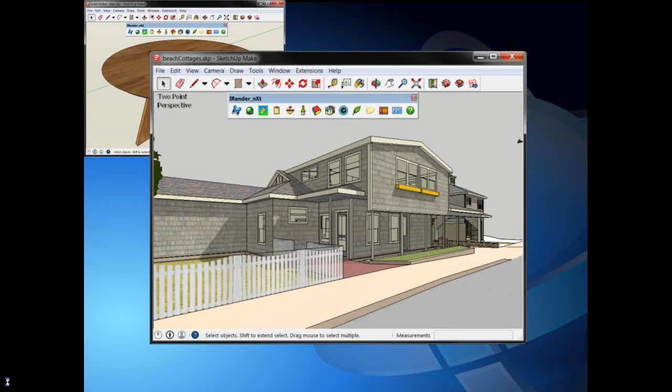Also, we don't know specifically how you use SketchUp in your office, so here's what we're going to do today. First, I'm going to open a model of an object, in this case a wooden table, and we'll create some renderings from it. The table is from the 3D warehouse. Next, we'll load a model of a beach cottage, also from the 3D warehouse. And then finally, we've built a small office interior, and we'll have a lot of fun with that with IRender nXt. In each of these examples, we're going to focus on how IRender nXt facilitates the creation of photorealistic renderings from SketchUp models.

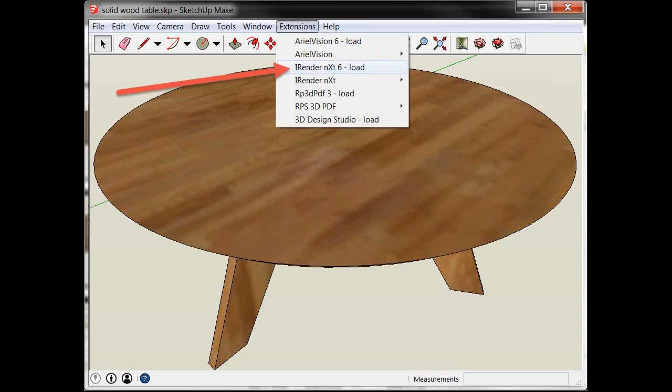If you have installed a trial version of IRender nXt, when you launch SketchUp and open a model, you won't have access to IRender nXt menus until you click Extensions. When you do, this drop-down menu will offer the IRender nXt software. So click IRender nXt 6 Load, and the interface will load for you.

Once we have a model open, I'm always pretty anxious to just create a rendering. So we'll click Render, and we see this dialog. This is the IRender nXt rendering settings dialog, and across the top you'll notice there are 5 lighting presets. These are very useful for novice and expert IRender nXt users. They prevent the creation of a rendering with no lighting whatsoever, which would leave your screen blank. We're going to use quite a few of these today.

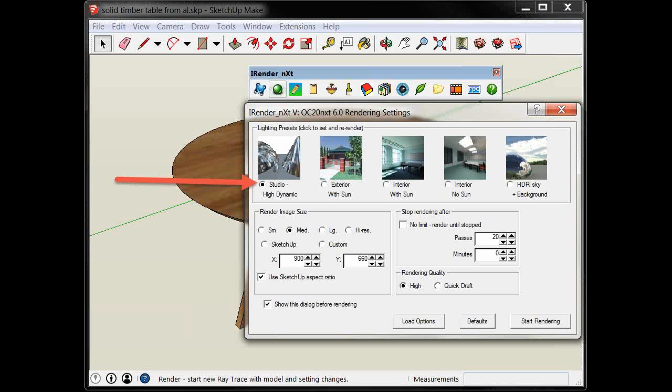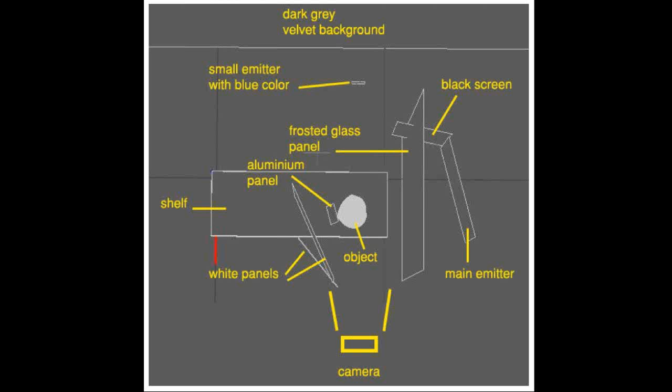The first one, very appropriate for our table, is a lighting preset called Studio High Dynamic. Here's how it works: imagine you had a table and took it to a professional photographer for a nice catalog photograph. The photographer would set up a bunch of lights, reflectors, some frosted glass perhaps, and in the end create a very nice photograph for your catalog. So Studio High Dynamic emulates this kind of lighting setting.

Once Studio High Dynamic is selected, all we need to do is start the rendering. And here's a rendering of our table.

Now, I'm going to be mentioning this several times today. There are a couple of key factors to photorealistic rendering. The first and probably most obvious is that we have access to materials that are photorealistic. This is a photograph of wood, so it is in and of itself very real. But what the model lacks in looking photoreal is the finish on the wood.

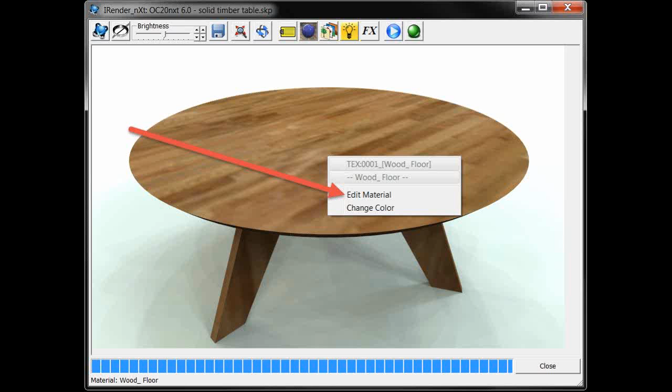What I want to do is click on the wood. That brings up this pop-up menu, and one option is Edit Material. Now, I want you to notice something interesting: we have not returned to SketchUp to do this. I'm still looking at the IRender nXt render window. So once a rendering is complete, I can click on a surface and edit a material, which brings up this pop-up menu.

What I want to do is change the finish of this wood to reflective. Click Reflective, click OK, and now render the model.

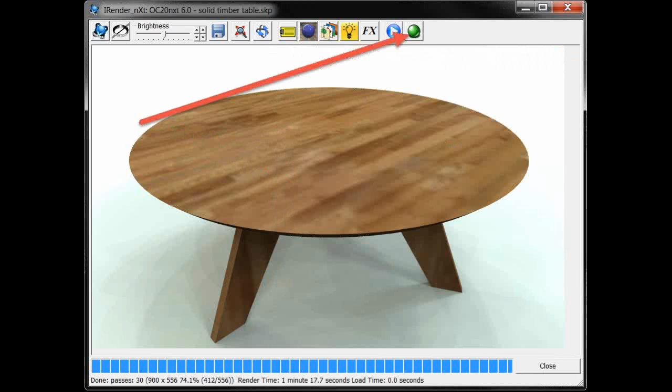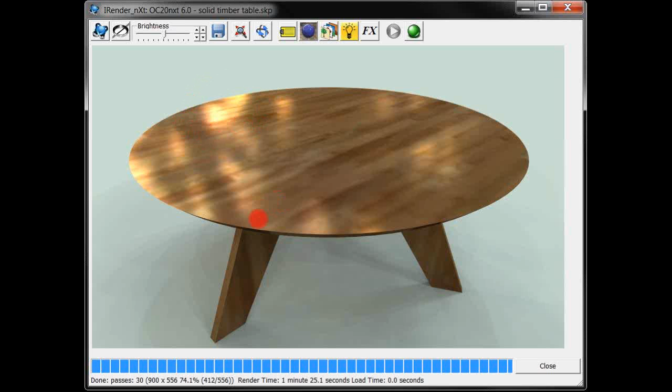This is the effect of Studio High Dynamic lighting with a reflective wood surface. You'll notice very subtle shading on this model underneath this table, all down in here. The biggest benefit of Studio High Dynamic lighting is this wood is now sampled in very bright light, in filtered light, and also in shadow. The nice thing is when I use this table model in another scene, I can reliably predict how the wood will render in virtually any lighting condition. So it's a nice preview of how the table will render.

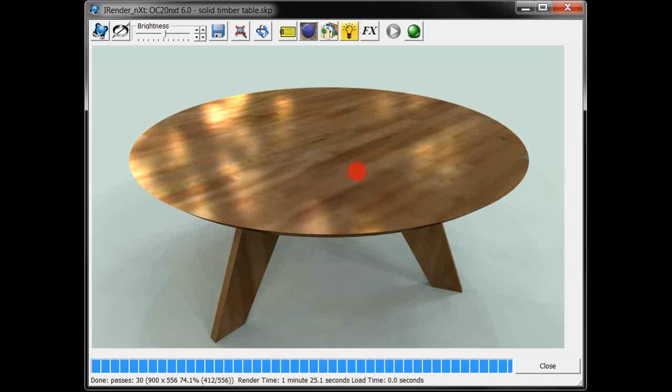Now I embellished this a little bit. This might be more what a photographer would provide for me. This was rendered with the Studio High Dynamic lighting preset. And of course I added, for the purposes of helping with scale, a newspaper and a vase.

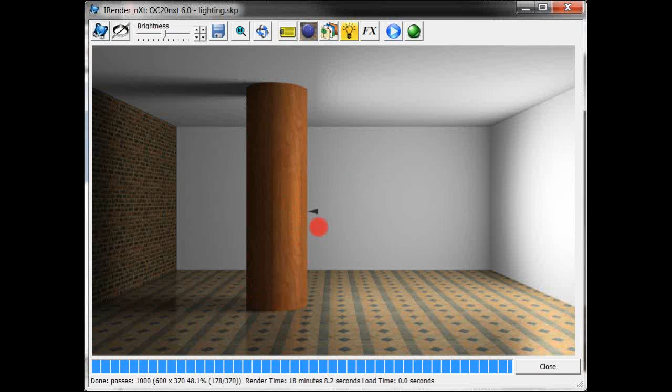All surfaces are reflecting light, and light is bouncing around the model, illuminating all of the other surfaces. In this case, all accomplished from one light. This is going to be important as we move on to the next model.

This is a beach cabin, again from the 3D warehouse. The nice thing about these 3D warehouse models is that when you open them, you don't need to do anything except click the render button. When we do for this model, we're going to change to a different lighting preset. This one's probably quite a lot easier to understand.

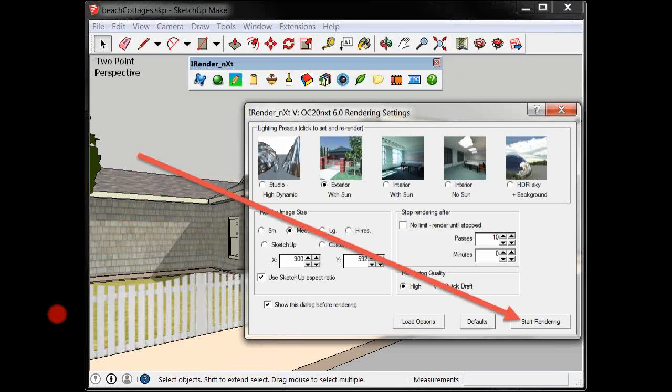This is exterior lighting, and it says with sun. What that means is that the sun is going to be used to cast shadows. Click Start Rendering, and here's the rendering. So here's the sun shadow.

You'll notice that the sky is the default SketchUp sky, and all of the glass in our model is reflective. The glass here is reflecting the sky. Down here it's reflecting the sky and also reflecting the columns. Pretty nice. I'd like to make this a little bit more convincing because I actually want a more convincing reflection in the windows.

What I want to show you is that it's not necessary to return to SketchUp, make adjustments to the model, and then create a whole new rendering. Now this didn't take that long. Across the bottom you can see that this rendering was completed in 20 passes, not very many, and it took 2 minutes to render.

So it wouldn't be that big of a deal, but it's even faster when you use this tool. This is the tone operator and filters dialog. And what I'd like to do is just increase the overall brightness of my rendering. That's done right here. So I'm going to bump this up from 50 to 60, and already you can see that the reflection of the sky is much more convincing, and additionally, because now there's more light entering into the building, I can actually see through the glass quite a bit better.

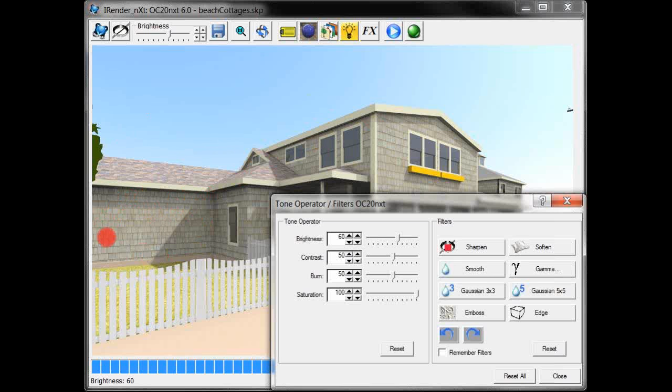What I'm not very happy about is that brightening the image caused me to lose a little bit of detail on this siding. So we're going to use a filter to adjust that. It's called the sharpen filter, and all I do is click, and now I have all of that detail restored to the siding. So now the image is a little bit brighter, still nice detail, great reflections in the windows.

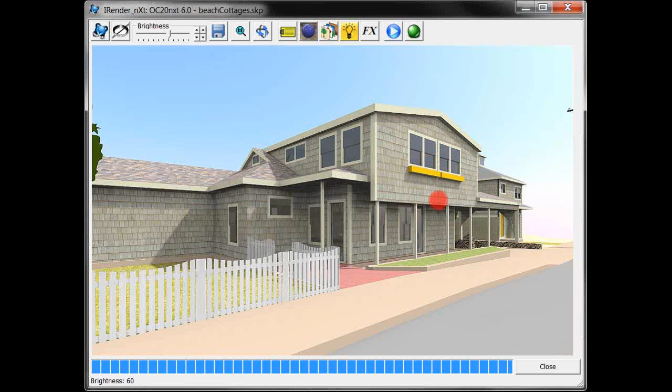This is another way to get to render settings. You'll notice that along the left-hand side, there's a nice long list of render settings. None of these are very complicated. They're actually pretty easy to understand. The first one, presets, brings us back to a dialog that we're getting pretty familiar with.

Another of the lighting presets is high dynamic range image to be used as a sky and also the background of our rendering. When we select it, all we need to do following is click Render. Now instead of the SketchUp default sky, we have this really nice photographic sky with clouds.

And look what that does to the reflections. Now instead of just boring blue, I have cloud reflections in my windows. The illumination to the model from the sky is actually quite a bit brighter, and that means it's even lighter inside the building, so the windows also become a little bit more transparent. In fact, it's very evident here where I can actually see through the building to a door in the back.

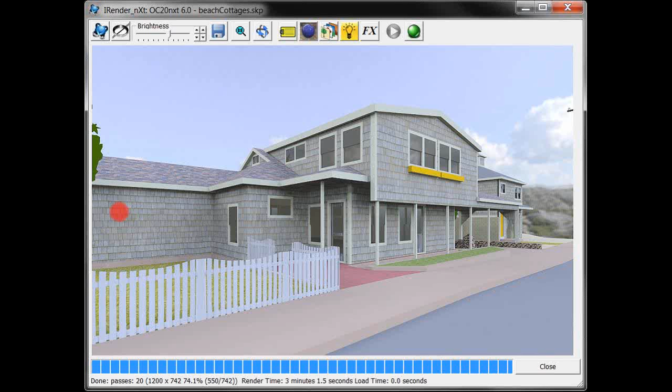Now I want you to keep in mind that so far this has been accomplished without requiring me to return to SketchUp. So what I'm doing is I'm taking a completed rendering and I'm enhancing it for the presentation that I have coming up.

There are more options, interestingly enough, and one of them is effects. An effect that is actually quite nice, especially on this model, is the use of haze. This is a very straightforward setting. First is the near setting, which simply describes how far from where I'm standing is the haze going to begin. And in all fairness, I've actually experimented with this a little bit, so I know that the right distance for this model from where I'm standing is 70 feet.

Once I have the distance set, I just need to increase the strength of the haze, and look what happens. Now this haze separates my wonderful project from this adjacent building. It's going to help my client keep focused on my building so that I can point out all of the great design features.

So far, from one completed rendering, I actually have 3 renderings that I can save and decide whether or not I want to use them in my presentation. The first is a rendering with the SketchUp sky. That was actually a pretty nice rendering, especially when we brightened it and kind of improved on the detail and improved the reflections in the windows.

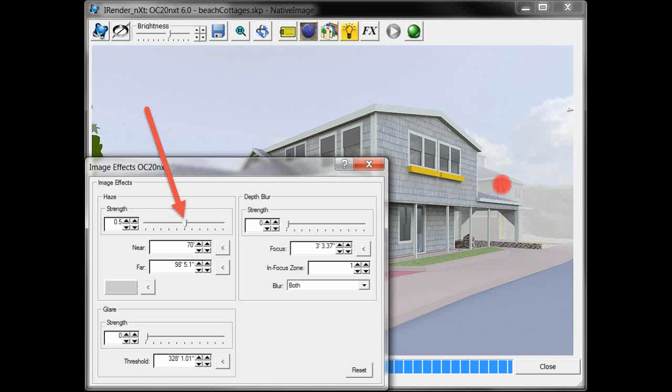Personally, the one I like a little bit better is with the sky background and the clouds in the windows. So that's rendering number 2. And now a third rendering, which uses haze to push this adjacent building back away from mine, emphasizing my project in the rendering.

So from one completed rendering, which took 2 minutes 6 seconds, I end up with 3 renderings, any one or all of which might be appropriate for a presentation to my clients.

Now, so far, we've looked at Studio High Dynamic Lighting as a preset. We've looked at the preset using the sunlight to cast shadows. And then we looked at using a high dynamic range image as a sky background, and that high dynamic range image is also used to cast light and shadows on our model.

So 3 lighting presets, 3 very different styles of renderings, and I hope you'll all agree that these lighting presets are quite valuable because so many lighting parameters that I would otherwise have to set up on my own are taken care of for me.

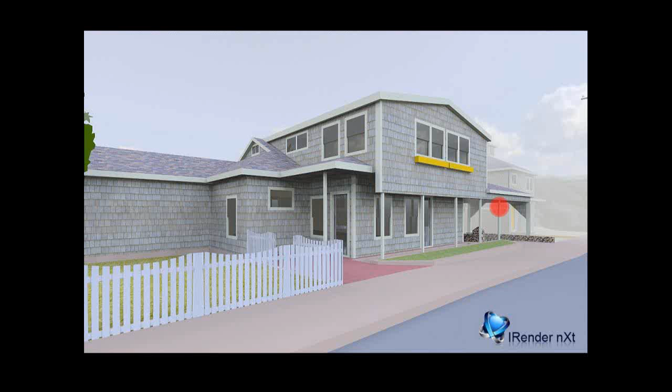I had one other thing that I wanted to do with this model. The daytime images are really, really nice, but what I'd like to do is take the same model and show you how little it actually takes to turn a daytime model into a nighttime model. And again, I'm going to accomplish this without having to return to SketchUp. So we're going to do this on a completed rendering.

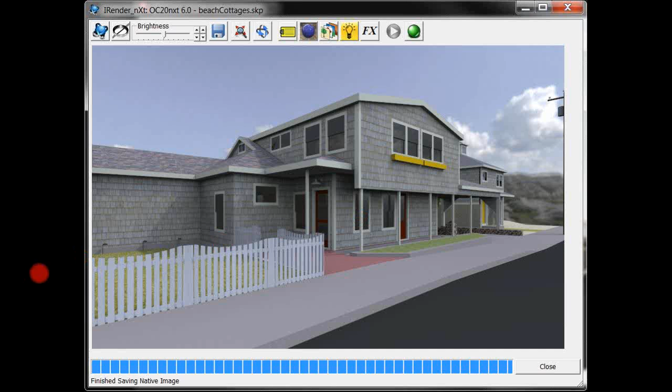This is going to introduce you to a very nice and very powerful IRender nXt feature called lighting channels. So here's the lighting channels dialog. Now this is displaying 5 of the 8 lighting channels, and each of them are labeled.

So the first one is the sun. You'll notice that although this was actually rendered with an HDRI sky, by default the sun is turned off when you choose the HDRI sky lighting preset. But you're able to go back to the settings menu and turn the sun back on, which I did, and that gives me a nice sun shadow along with all of the shadows and highlights that are created by the HDRI sky.

So you don't have to settle for the lighting preset. You have 100% control over managing the lighting for your renderings. Now keep in mind, my intention is to tone this model down and create a nighttime image. So the first thing that I want to do is I want to just turn the sun channel off.

That means uncheck it. So when it's unchecked, it's off, and you can tell that it's off because now the sun shadow here and on this wall is gone.

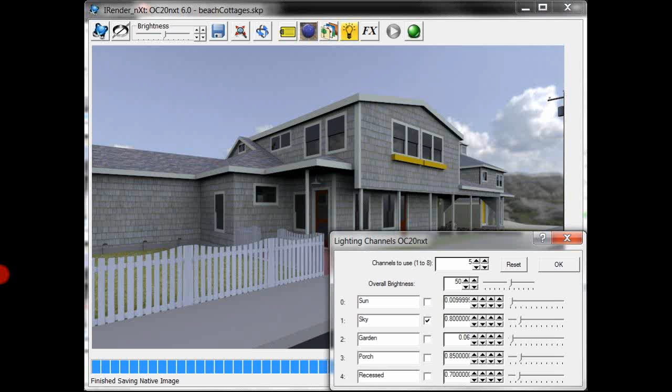Next, lighting channels allows me to turn lights on and off, and also allows me to change the relative brightness of each channel. One of the channels is the sky. Currently, the brightness of the sky is set to 0.8.

Full on would be 1. I'm going to turn sky down to 0.2. So I've darkened it considerably. And now, of course, my building, unfortunately, has gotten a bit dark.

So why don't we turn on the garden lights, the porch light, and then I'm just calling them recessed lights because they are recessed can lights underneath this small porch.

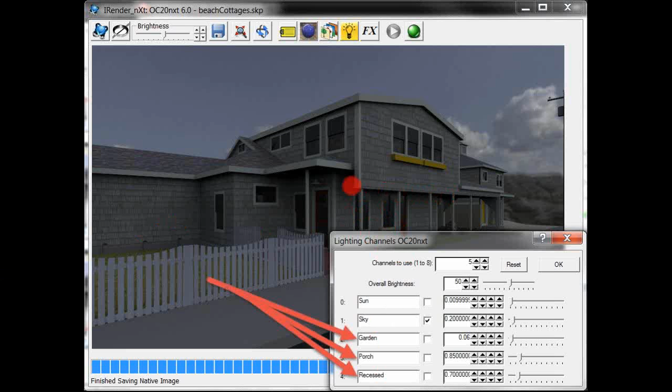And I admit I had a little bit of fun with the garden lights because I made them color. So I've got a red one, a yellow one, and a blue one.

Now this is a much more dramatic change to a completed rendering, isn't it? Because I've taken a bright daylight image with beautiful cloud reflections. I've dimmed everything down, turned on some lights, and now I have an evening image of my model.

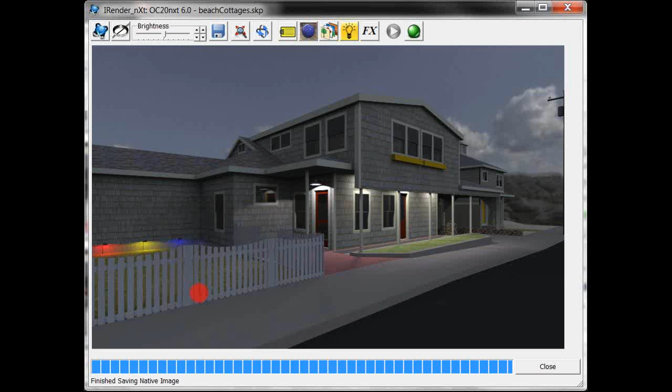All done on a completed rendering using a very advanced IRender nXt feature called lighting channels. And we'll be playing with that, with lighting channels, more in the next model.

So here's yet another presentation rendering that I'm able to accomplish from an investment of 2 minutes and 6 seconds to render the model.

Here's the third model I promised. This is actually not from the 3D warehouse. This is a model that we created specifically for the purposes of demonstrating some more advanced features in IRender nXt. It is a pretty simple little model, but I'd like you to take note of a couple of very interesting features.

The first is this glass table and the beautiful reflections in the table. The second is that this vase, if you remember, this vase was from, I used it on the table, but it was a white vase.

When I brought it into this model, I changed the color to gold and made it very reflective. I did the same with this lamp. When I brought this lamp in from 3D Warehouse, it was actually black. I changed it to gold and made it reflective, and now it looks like a nice brass lamp.

So when you bring models in from 3D Warehouse, you can use them as is. They're wonderful, and they are absolutely ready for you to put into your model, click render, and away you go. But you also can modify them if you want to and make them more tailored to the design ideas you have for your model.

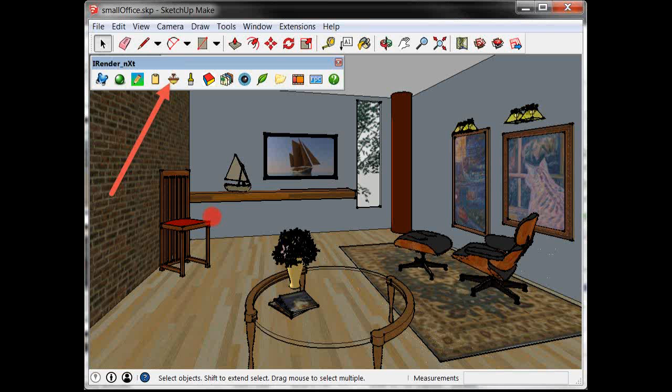The arrow is pointing to the Render Ready Components dialog, which looks like this. And the first thing I'd like to do on the Ceilings tab is just position a couple of round recessed lights in the ceiling.

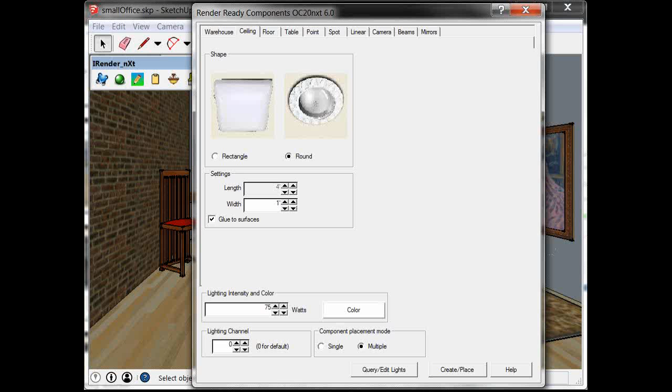I want to point out that all of the attributes of the light that need to be set in order to place a light in your model are right here on this dialog. When you're satisfied, click Create, Place, and place lights.

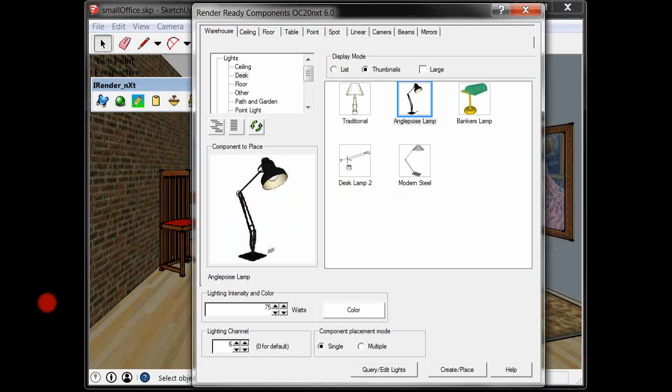Now I placed multiple - I actually positioned a light here and a light here. Right back to the dialog, here's the lamp, and as I told you, when I first grabbed it, it was black, and then I modified it so that it would be more interesting for my model. Same thing, place it and pop it into your model.

Now I have a surprise for you, because you see the picture of the sailboat on the wall - actually, that's a television. And what I want to point out is that with IRender nXt, anything can be a light. Here's how you do it.

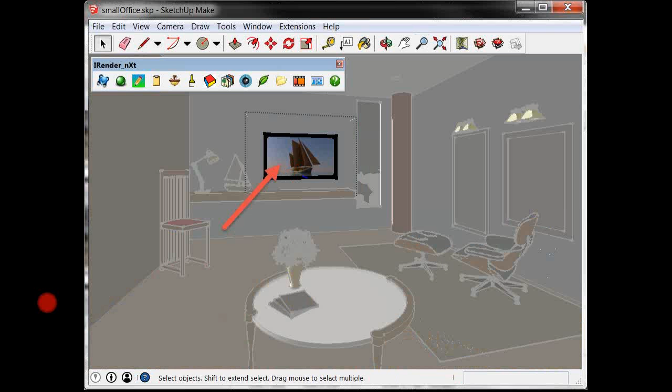So we double click on the television set to explode it. And now we specifically go after the image on the television screen. With this pop-up, what I want to do is set the object properties for that television screen.

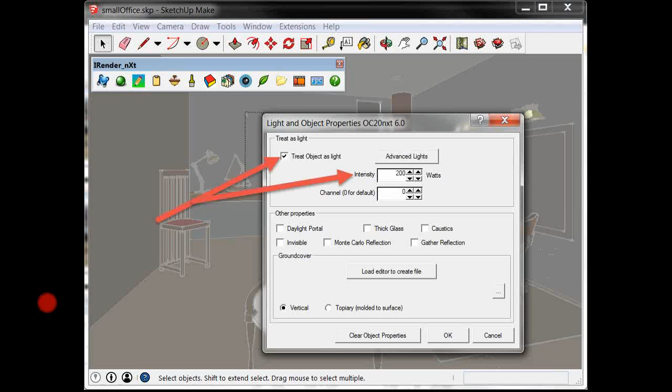Specifically, that means treat the television screen as a light and give it 200 watts of brightness. Those two settings, that's it. The television screen is now a light.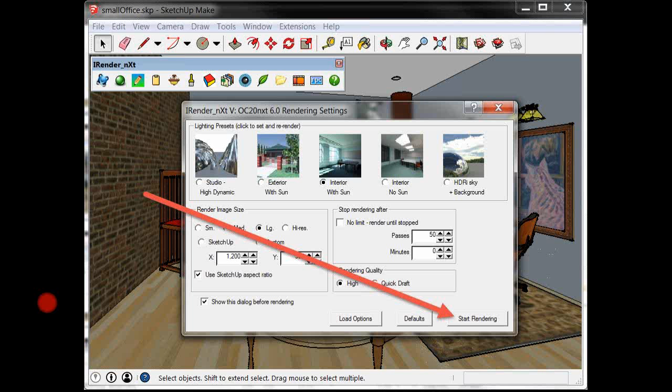Let's render. Now this time we're going to change to another lighting preset called Interior Lighting with the Sun. I have a window in the back, so it'd be nice to let the sunshine in. Here's our rendering.

Now again, what we have in front of us is the rendering window. So this is not the SketchUp window - this is the IRender nXt overlay window. And what I want to do is click on this column.

It's actually quite nice as it is, just sort of a painted red column. But one of the great features of IRender nXt that you'll want to learn to take control of is managing reflective materials.

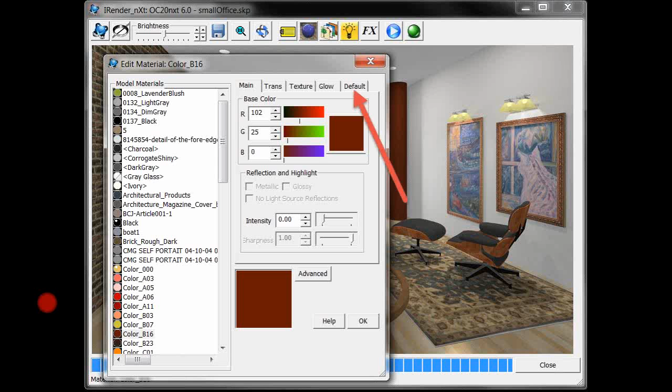When I click on it, this dialog comes up - this is the Edit Material dialog. And this you've seen before, because now we're back to the finishes portion of the dialog. Now, I appreciate that all of these seem to be very focused on whether or not a material reflects or is transparent.

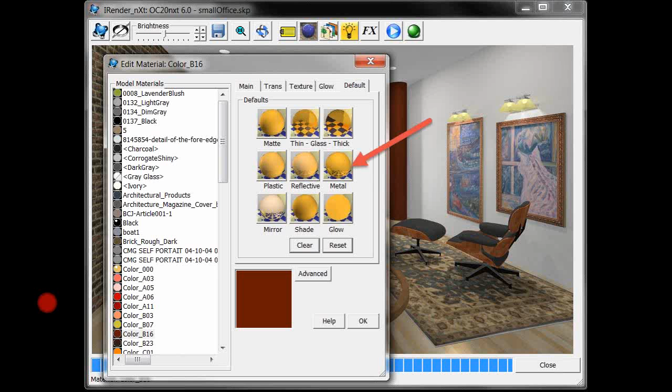But if you think of this in terms of finishes, what I want my column - the finish that I want in my column - is a shiny metal finish or polished metal finish. Because when I apply that finish and then render the model, here's what I accomplish.

Now it looks as though it's wrapped in shiny red metal. And I did this without further adjustments to the reflective property. I was satisfied with selecting metal and clicking OK, knowing that the default settings for metal are going to be very appropriate for the look I'm after. But of course, I can also go back to the materials dialog and edit these settings very, very specifically.

You're going to think I have a fascination with going from daytime images to nighttime images, but that's such a dramatic change to an image that I know it'll make the impression I want to make.

Once a rendering is completed, you have the possibility of taking one rendering—in this case, this rendering took a couple of hours, about 50 passes—and modifying it to create another possible presentation image for your interview or client presentation.

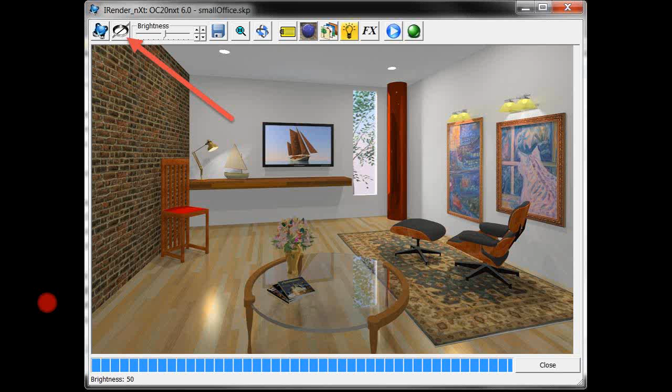So the first approach for me is to lower the overall brightness of this image, to go from bright daylight to an evening image. Look at the bottom arrow, saturation.

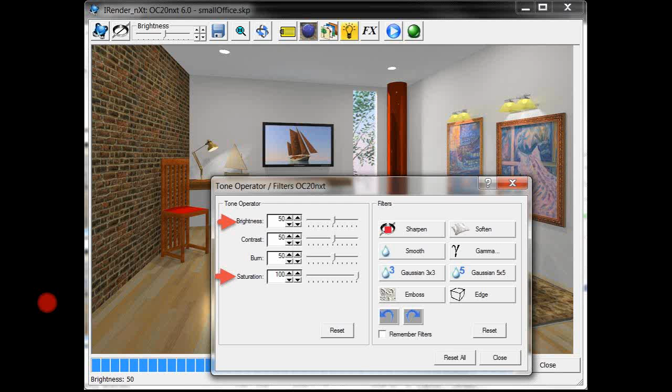This is also pretty important for nighttime images, because if you walk into your living room in the middle of the night with very little lighting, the colors aren't quite so bright since there's less light reflecting back from surfaces to your eyes.

So what I do is lower the brightness down 10 points to 40, and saturation down 30 points from 100 to 70, to dim all of the colors. That gives me a much more convincing evening image.

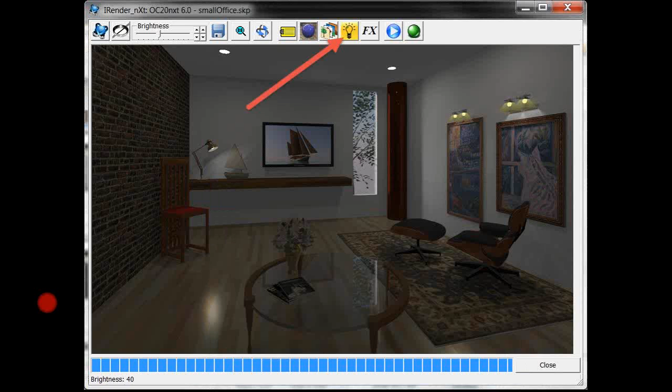I still have a couple of things I need to work on. I'm going to go back to my handy lighting channels dialog. The first thing I want to do is turn off the sky.

This is one of the things that really impresses me about these renderers—once there's less light coming into the room, notice how the inside of the room starts reflecting in the glass. There's still plenty of light on this tree, but there's so little light outside compared to inside that I can see the lights, and I can even see the pictures reflecting on the glass. That'll improve even more in just a minute.

Now the television for a dark room is a little bit dark, so I'm going to brighten it. That's the benefit of being able to make anything in your model behave as a light.

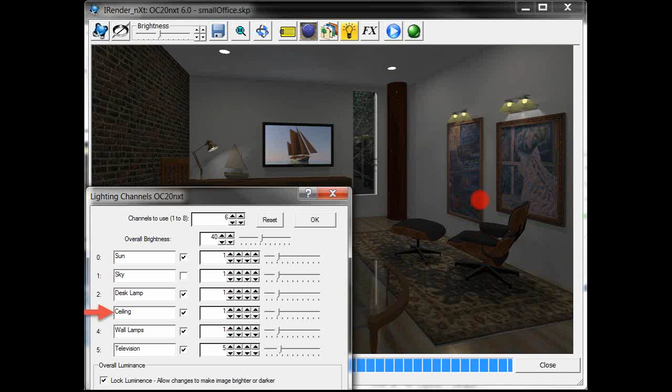Let's turn off the ceiling lights to dim the room a little bit more. Ceiling lights on, ceiling lights off. Watch the walls and how they change so nicely.

And then lastly, I didn't want to turn the sun completely off, but I really lowered its value from 1 down to 0.1, so now I have the effect of maybe the moon shining in through the window.

On your screens this might be a little dark, but on my screen it looks absolutely fantastic. I would not hesitate for a minute to show this to a client, because it's very, very nice lighting in this room.

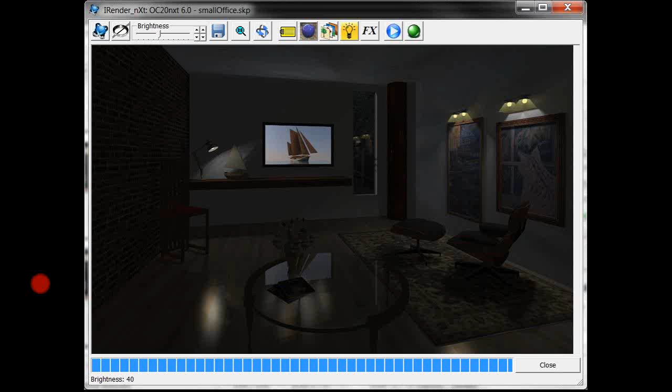And again, here is the original rendering, all completed with IRender nXt.